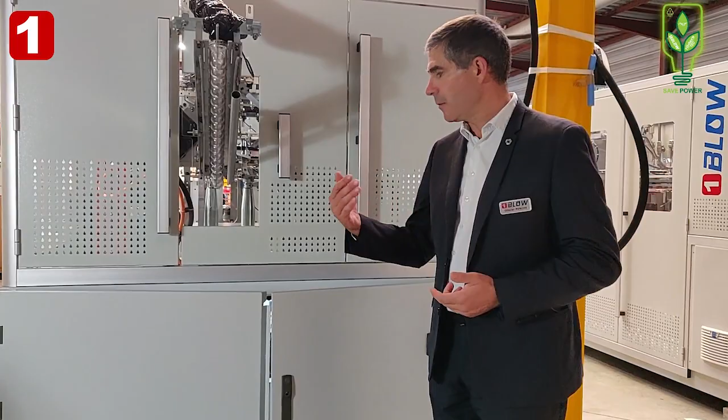The electrical cabinet, as I will show you now, is fully integrated. It is placed here, okay? And so you see everything, every component is here, directly cabled to the drives and sensors of the machine. And it has an integrated power recovery system.

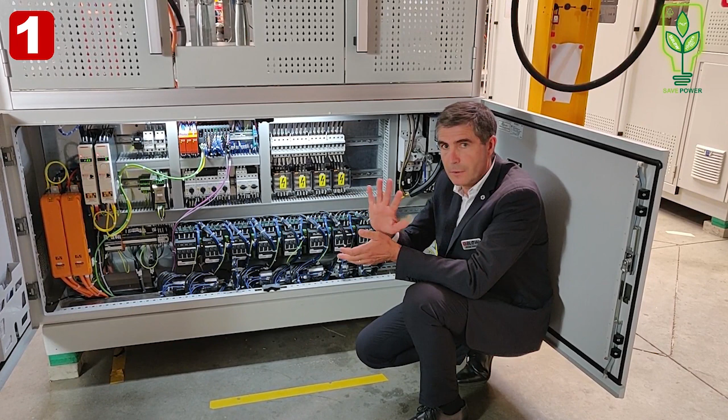That is to say, at the end of each drive phase, there is a braking phase, and during this braking phase, power is recovered by this system and resent to the other drives of the machine, not to your system. There is no interference with your machines, of course. This brings you a saving of 2 to 3%. This is already a good starting point, 2 to 3% saving on power thanks to the power recovery unit.

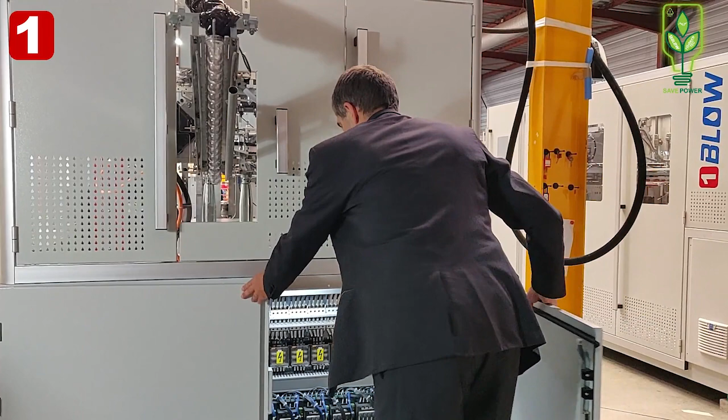The next point of consumption, or main consumption, of a PET blow molding machine is of course the heating. Let me show you. So here are the ovens. Here are the 3 ovens of this 2-cavity machine which we are in front of. I can open easily each oven. You see, very easily accessible. These are standard lamps.

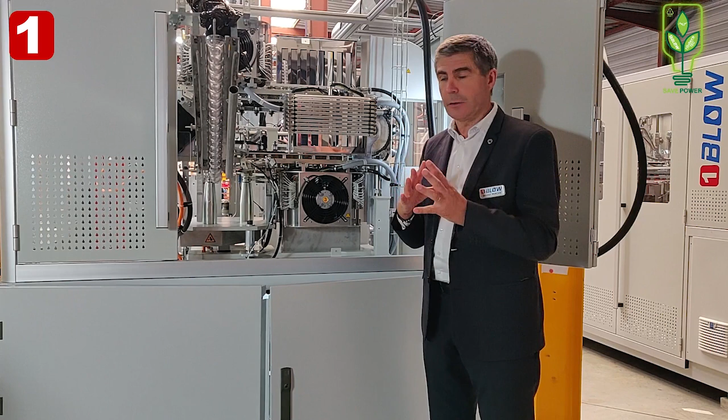Each lamp can be positioned and adjusted in height and in distance to the preform. And of course, the operator can adjust the power of each lamp directly from the touchscreen, so that he creates a dedicated heating profile for each preform and each bottle. Thanks to this accuracy and all these settings, you can already optimize the power consumption of each bottle. But this is not sufficient.

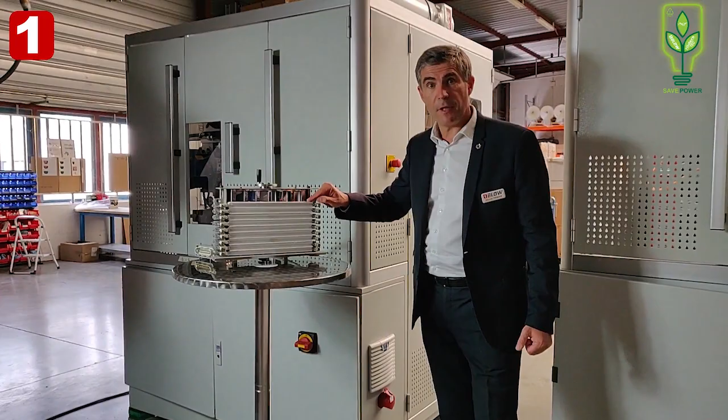We propose you also other lamps, which I will show you in a minute. We call them eco lamps. These are equipped with a ceramic reflector. You can see here this white part, which focuses and concentrates the infrared rays onto the preforms. Thanks to this, you need less power for the same heating result.

We measured this power saving with some of our customers in real production conditions, using 1Blow machines with and without eco lamps. Same customer having 2 1Blow machines, with eco lamps and without eco lamps. Depending on the bottle size, they were saving between 28 and 34% power. So you see, you have a big impact on the consumed power of your 1Blow machine with these eco lamps. This is not the only system on electricity.

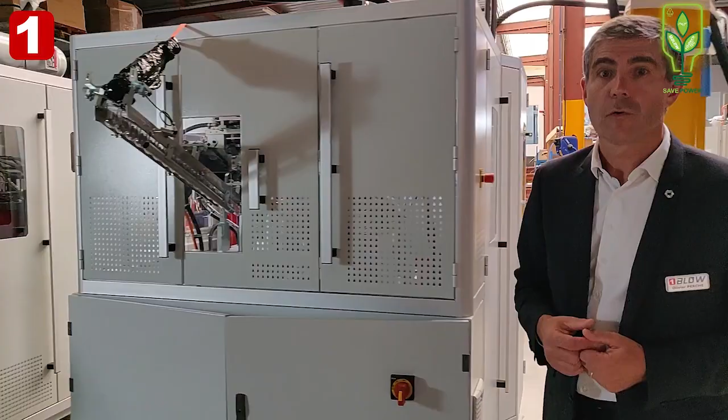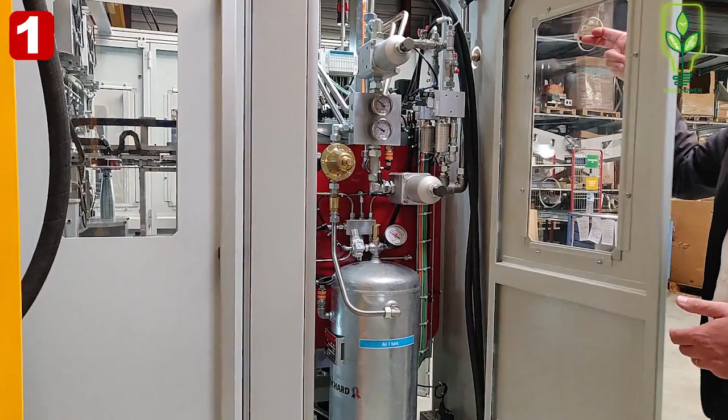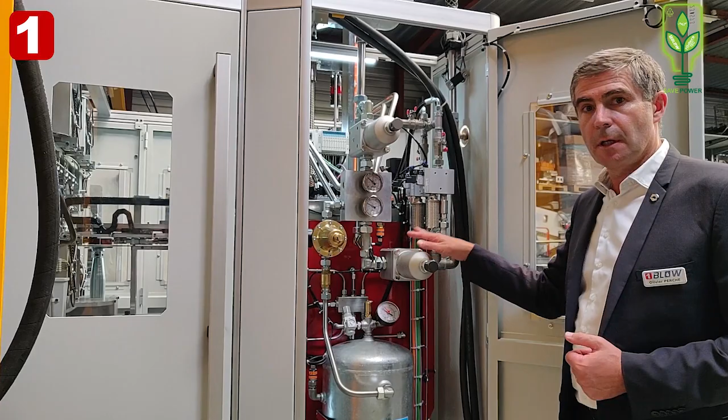Another big point of power consumption on a PET machine is the compressed air. And I will show you now where you can save, again, a lot of energy using the compressed air in a better way. We are here in the pneumatic control system. We have here this first reducer where the 40 bar nominal pressure comes in. You can reduce or adjust the blowing pressure to any level. Let me explain to you. The machine has no lower limitation on blowing pressure.

That is to say, your bottle process is what decides or gives the limitation to the lower blowing pressure. Certain bottles need maybe 40 or 38 bar to make a good bottle. Another bottle, maybe you can produce it with 30 bar or even less. Then you can adjust your blowing pressure with this reducer. So let me go more in detail and give you some figures.

From 40 bar to 35 bar, this is 12.5% less air consumption. From 40 bar to 30 bar, this is 25%. And another example, 40 bar to 26 bar, this is 35% less air. So you see already it's a big difference. Taking this into consideration, if you have a compressor sized for 40 bar and then you use it at a lower pressure, around 30 bar, then you will use 20% less power. This is the first positive impact.

But take it more in detail: as you need less air, you will require a smaller size compressor with less installed power. Altogether, for example, from 400 cubic meters per hour, if you blow at 26 bar, you will then need 260 cubic meters. From this 260, you will need a smaller compressor at a lower pressure, which means the difference between the bigger compressor at 40 bar and the smaller compressor at 26 bar could reach 50% less power consumption. So there you have a big point of improvement and saving on your power consumption.

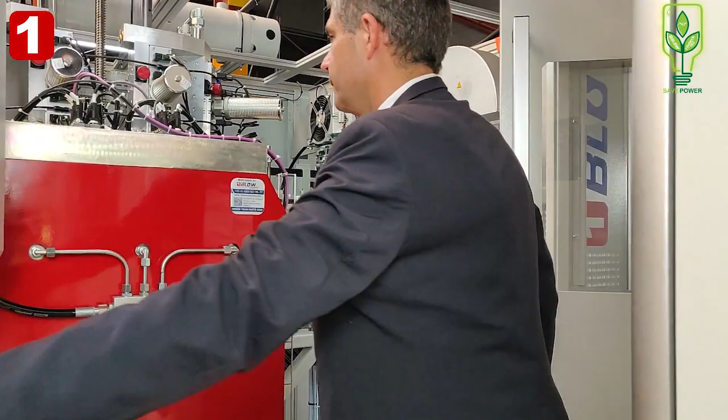And we will finalize our turn around this machine. Let me show you where the air recovery system begins in the machine. Each block of valves is equipped with 4 valves inside: pre-blowing, blowing, recovery, and exhaust. So this recovery valve opens and sends the air after blowing to the 7 bar vessel we saw on the other side.

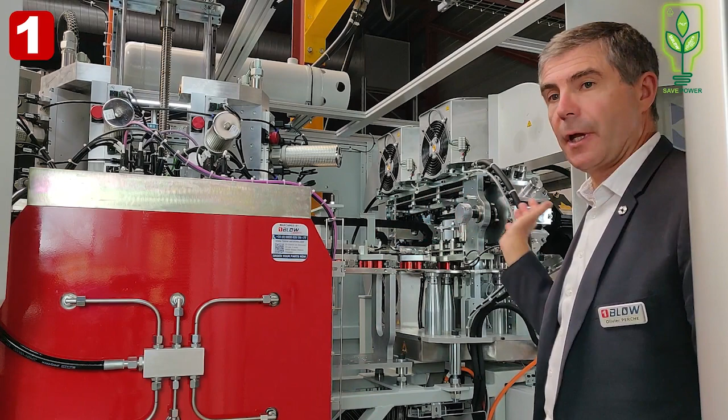As we are now in front of the machine, you see it's a very open architecture, very easy to access, with few movements and short movements. Few movements means fewer drives, less power required, and short movements also means less power required to drive these movements and transfers, as well as less wear, so less maintenance, reducing again your production cost on your bottles.

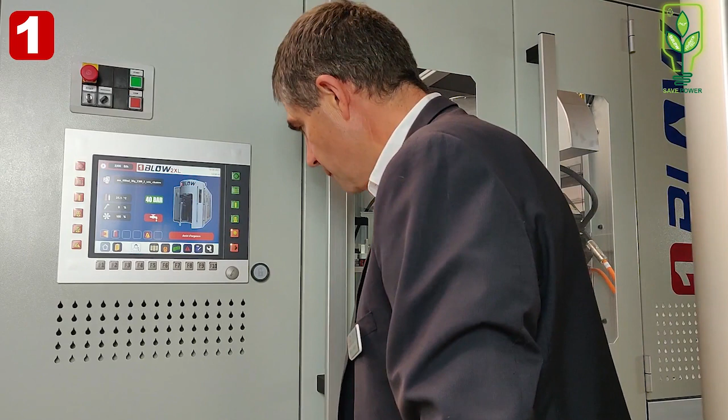Now we have seen the machine in a standby position, and I will be pleased to make a short demo in the next minute. Let us run this machine together. I will close the doors. We'll make a demo showing you this machine producing bottles. After that, I will be glad to answer your questions.

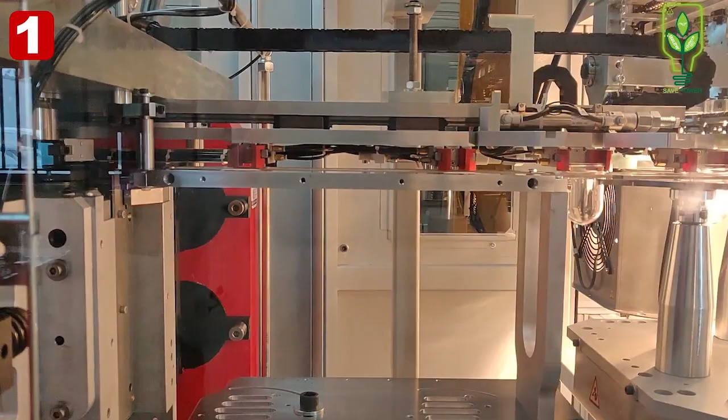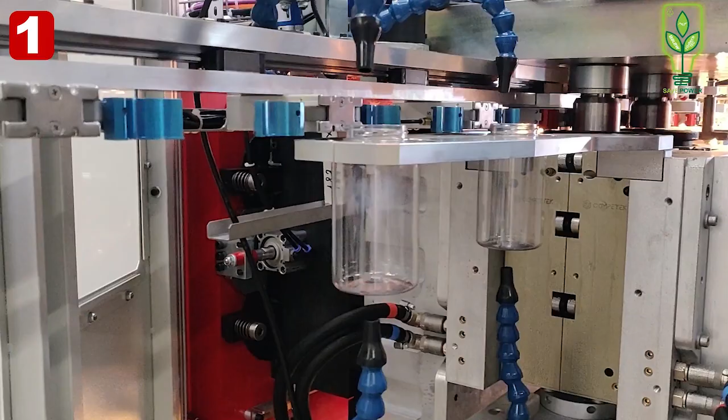Olivier, thank you for that. Was there anything you were going to add at the end of the film presentation, or shall we move on? We will move on. Okay, that's great. And I now know more than I did this morning, so that's always a good thing. Every day is a learning day.

And now it's my pleasure to introduce Steffen Lühning, sales manager at Röders. I'm sorry, I probably mispronounced your name, Steffen. He joined Röders in 2010 and holds a bachelor's degree in business administration, which he gained in 2013. His responsibilities have included development of the Röders laboratory for PET bottles before he moved on to become a sales and project manager specifically for blow molds. Now he is involved with customers right from the design phase, works with them on development, mold design and engineering, and takes projects through to the finished article. He has experience of hundreds of projects and a profound insight into energy saving through smart blow mold solutions. Steffen, over to you.

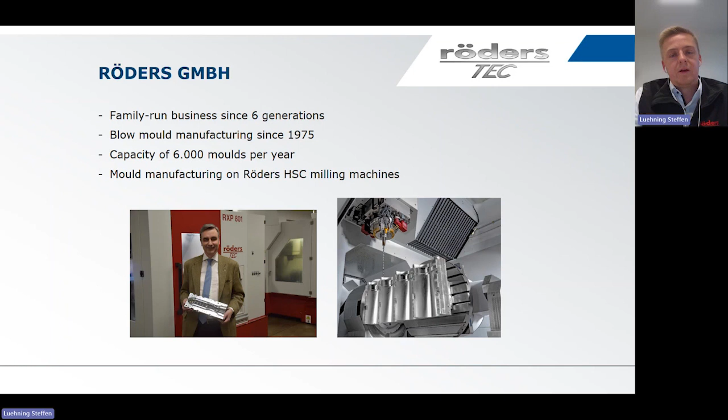As I mentioned, we started in 1975 with the first blow mold projects, at that time for the company Krupp Corpoplast, which many of you know today as KHS. We also started to manufacture the first petaloid base a couple of years later, and we were one of the first companies using 3D CAD/CAM technology here in Germany, together with Volkswagen and Daimler-Benz.

At the beginning of the 1990s, there was the development of the milling machine technology at Röders, so we were able to cut down the manufacturing time for our blow molds considerably. This is where we still benefit today. Meanwhile, the milling machine business became the biggest part of our company. But still very important today is the blow mold team with all the background departments.

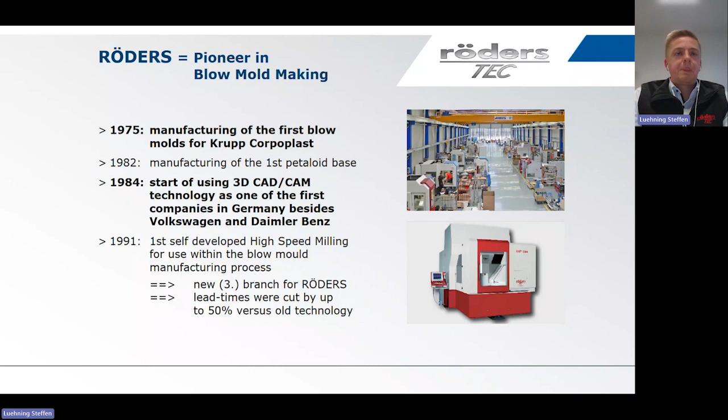Then, at the beginning of the 1990s, we also developed special quick change systems for different suppliers: for Sidel, for SIG Corpoplast, and afterwards for the Krones system. In 1994, we manufactured the first heat set mold for Johnson Controls, and from 1997 we had an exclusive partnership with Krones. So for a couple of years, we supplied all the molds to them. We were also involved in the development of the SEPA mold type.

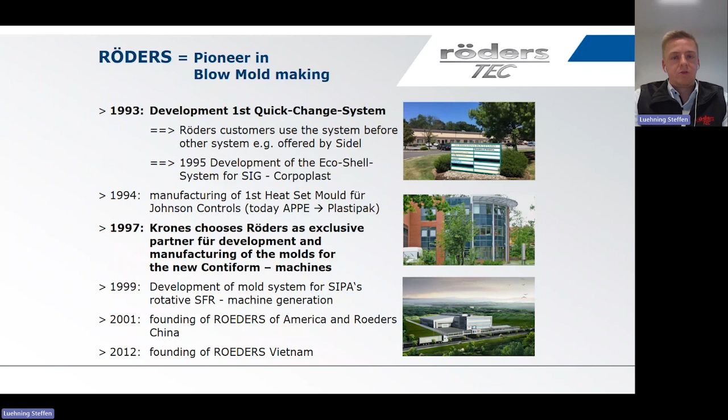So we are very familiar with all the mold technical details of the 4 big suppliers, just to sum up. At the beginning of the 2000s, we went international, with the founding of Röders of America and Röders China. And since 2012, we also have a manufacturing site in Vietnam.

In terms of our blow mold manufacturing team here in Soltau, as mentioned, we developed the quick change system, but also introduced 3D printing technology a couple of years later. We engineered a new office building in 2019 for our milling machine department, which gave us a lot of space for our blow mold manufacturing area here. In 2019, there was also an investment in a new blowing machine, a one blow machine. So what you have seen in Olivier's video is what is running at Röders every day.

The one blow machine is very helpful, doing samplings for us every day with new bottle projects for our customers. We also have the opportunity to install different kinds of mold types there. So no matter if the customer has a KHS, a Sidel, or a Krones machine, we can install all the mold types on that machine. We are working with special adapter solutions to adapt all kinds of mold styles.

That allows us to react flexibly, and the customers can also use the pilot mold as a spare mold for their production set at a later stage. In 2021, we invested in a new laser scanning machine, which you can also see in the lower picture. To re-engineer bottle shapes or mold parts, this is a very helpful tool for us.

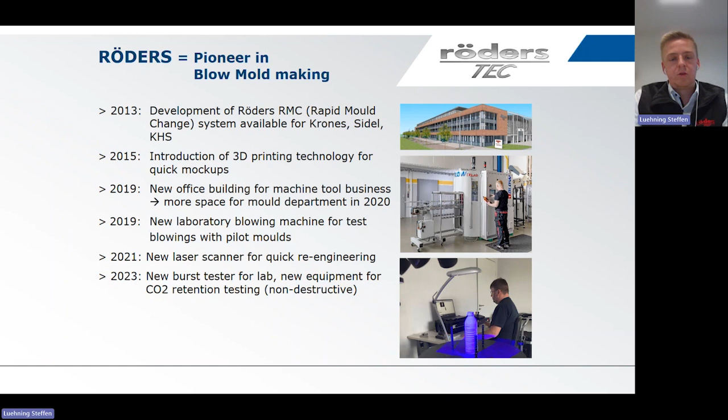And this year we also have invested in new equipment for our laboratory. So a new burst tester was installed, and also new equipment for CO2 retention testing. But maybe as further information, we are a certified laboratory, so we can also perform lab testing for all kinds of bottle shapes.

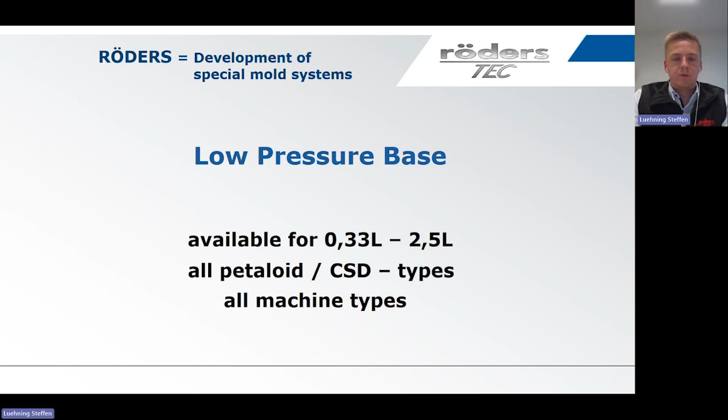Basically the more interesting topic for us, meanwhile, is saving energy with our blow mold technology. So over the years, we have developed a low pressure base mold, which meanwhile is available for various formats. So starting from smaller bottles, but also for the bigger formats, for all petaloid, so for the carbonated soft drinks projects. Just to give you an idea of how this looks like.

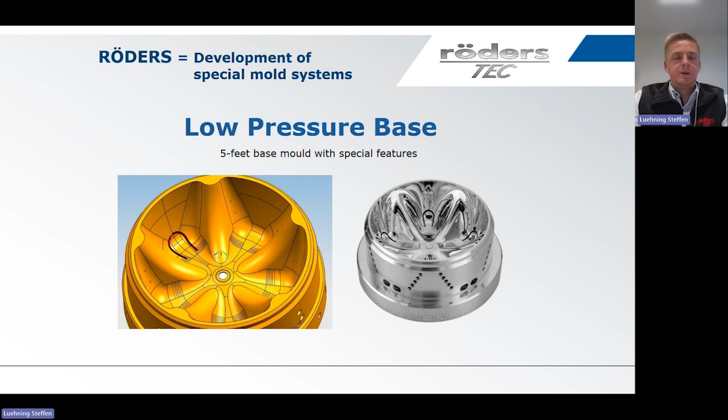Just to sum up a little bit the benefits which we see and which we have seen over the recent years in use and also with our customers. We basically see an optimized material flow so that the PET material can get into all the areas, all the base feet, quite easily and quite smoothly. So that's a good benefit.

The special venting channels, which you can see on the picture, will allow the air to exhaust easily and will allow the effect that we can reduce the blowing pressure, so what you probably know as the P2 blowing pressure, considerably. So I have a couple of reference projects also with me, which I will show you later.

We see that this base also is designed for a minimum of material requirement. So also lightweighting projects are feasible with this base design. And especially due to the energy reduction, there's also, of course, a lot of saving in terms of the cost for bottle manufacturing.

What is also clear and what we have seen over the recent years is that the venting channels do not affect the stability of the bottle. So that usually could be a good question, but that's not the case. So we are very happy to share the information that there's no effect on any kind of stability of the bottle.

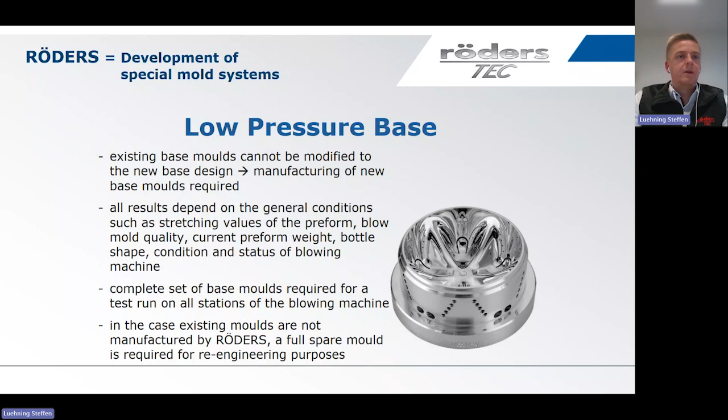Meanwhile, the low pressure base molds have been installed in various companies. Just to give you an example, Coca-Cola, Pepsi, Refresco, Hansa-Heemann, Carlsberg, Royal Unibrew are some of the companies you probably know where we have installed our low pressure base mold technology in recent years.

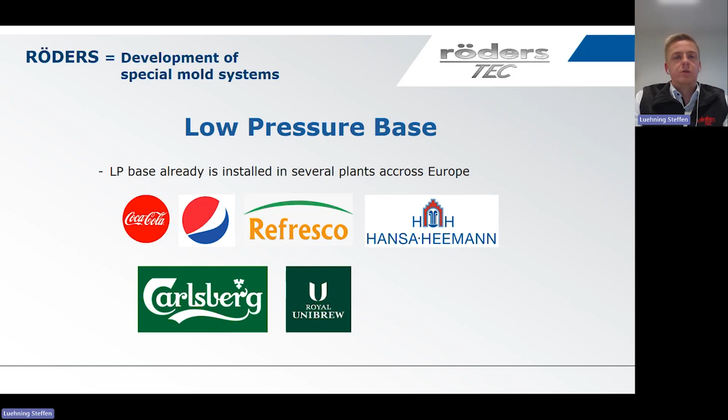And to give you a couple of examples of what is possible in terms of saving, there's one Coca-Cola example in this slide, for a 330 ml bottle, where the Krones machine was manufactured back in 2015. The blowing pressure before the installation of the low pressure molds was 25 bars. And after the installation of our low pressure base cup, we were able to get down to 17 bars. So as you see, there's already a high potential for saving.

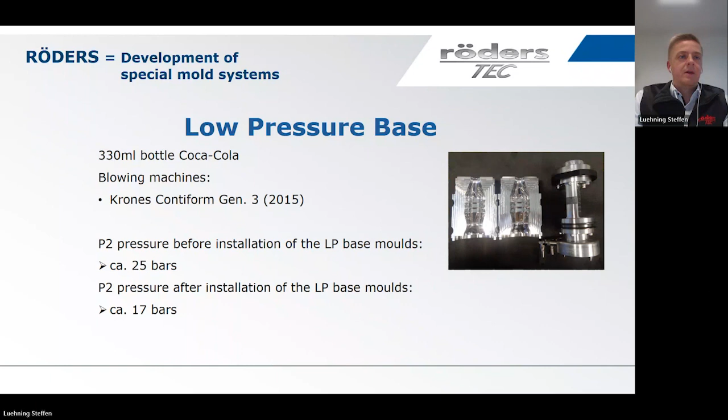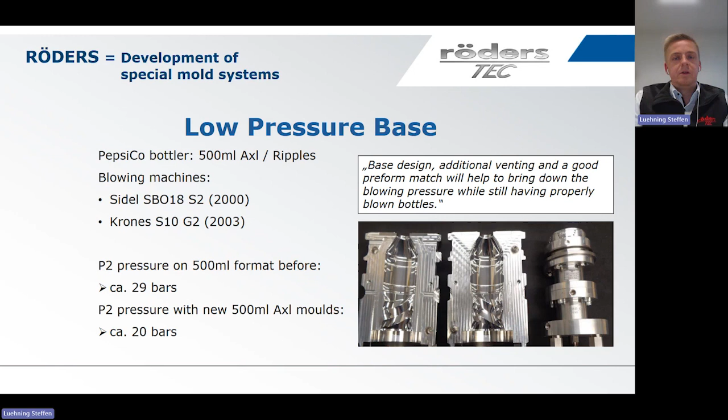Another reference project was for a customer in Belgium for 500 ml Axl and Ripples. So there were the machines, an SBO 18 Series 2 from 2000 and the Krones S10 Generation 2 from 2003. So machines were a little bit older, but even on these machines, we were able to get down with the pressure from 29 bars before to 20 bars after installation of the low pressure base molds.

What we also are offering, and what could be very helpful for training of your operators as well, is that we can supply technical service engineers who will help you to set up a good blowing process together with the new base molds, so that they understand how this technology will work and what is needed to get down with the pressure.

So with our service technicians, there usually is a good way of receiving a proper material distribution so that we can get down with the pressure, so reduce energy consumption, and also make sure that there's a stable blowing process, so that after our technicians have left the plant again, your operators feel confident running our low pressure base mold technologies. And as mentioned, there always will be the training of the operators if they work together with experienced service technicians.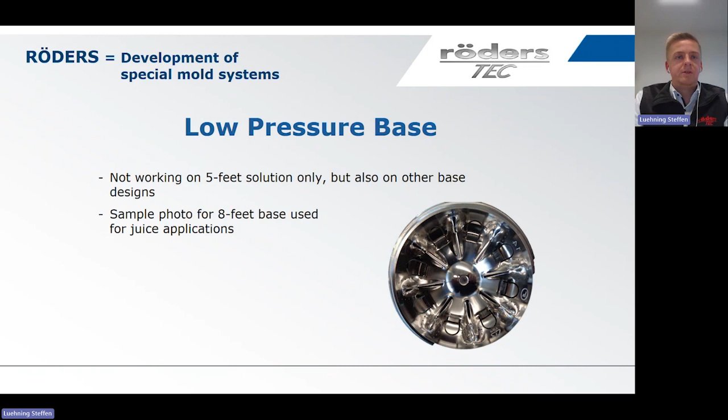Just to sum up again, all potential results. It's not magic that we automatically can get down from 30 bar to 20 bar. There's a little background information which always is important: the stretching ratio of the preform, condition of the mold, the preform weight, the bottle shape and volume, and also the configuration and condition of the blowing machine.

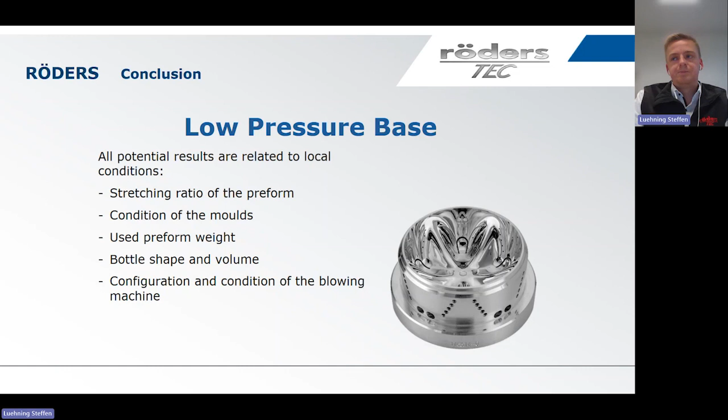Last but not least, I also wanted to share a brief checklist for bottle design, which always is important during these low pressure projects. For example, we also work on bottle drawings with our design team and optimize them from a technical perspective. So in case you're asking for a new bottle drawing, we always need to know the bottle size, the fill level, volume, and your headspace requirements.

Also important is the product which you intend to fill, and if there's a certain CO2 level or the use of nitrogen, so that we can evaluate the expansion of the bottle, which might be important for the choice of the right base. And of course the name of the project, the neck finish, the preform weight, so that we can do the volume calculation properly. And also in case you have main requirements for dimensions, for example, you want to work with an existing diameter or prefer a similar height meeting your specification from existing bottle shapes.

Labeling, base design, other details as far as you know. The more information we have, the faster we are able to make a bottle drawing. And there will be no questions for getting any feedback, so we can react quite fast and provide the bottle drawing quickly. That's my part basically.

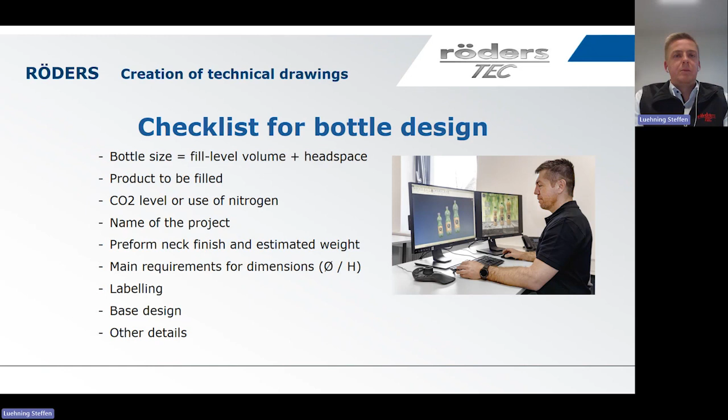And while you're here, I'll come to you with a few questions first. We have had some flood in. First of all, can I ask you about the low pressure base? How do you ensure bottle integrity when it is being blown at a lower pressure than has traditionally been the case? Does it only apply to smaller bottles?

Do big bottles still need a lot of pressure, or is it a technology that applies across the board? Yeah, basically we have seen that this technology is feasible for all kinds of formats. So no matter if you have a 2-liter bottle or 2.5-liter bottle or 1.5, this technology is really working very well. We have seen, meanwhile, also 1.5-liter projects, or even this week I was traveling in Poland, and we have blown 1.5-liter and 2-liter bottles with 19 bar pressure. So that's really a technology which will work no matter if you have a small bottle or a bigger bottle.

We also see that there's no impact in terms of laboratory testing. As mentioned before, we do have a certified laboratory here, doing a lot of lab testing every day with PET bottles, either blown on our blowing machine or blown at the site of the customer. And we can say that there's no impact. So stress crack testing, burst testing, thermal stability, all these critical things are showing good values together with our low pressure base design. So we can really say that we are very confident with that and proud of this technology.